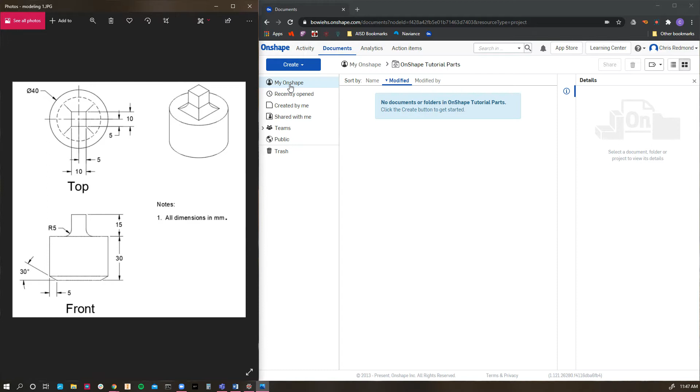Let's start. We're going to do this drawing right here. This is a part that PLTW has provided, some of the drawing, and we need to tackle this in OnShape. So I'm going to create a new document. I'm going to call this the spindle widget—looks like a spindle to me. There we go. Once we're in the parts studio, we need to figure out how to tackle this.

Now, you might be looking at the part here and going, hey, that's a cylinder, I know how to make that. That's pretty easy, that's just a circle that I then extrude up a few millimeters. That's not what we want to do. The reason is down here, this little notch that's being taken out of our cylinder. That is going to prevent us from just using a normal circle and then extruding that.

So instead, what we're going to do is use the Revolve tool. What we do in a Revolve tool is you're going to have to use your imagination. You're going to split this in half, and you're going to build half of it, and then we're going to revolve it around an axis.

So we're splitting this in half. I'm going to start a sketch in OnShape. I'm going to select the front plane, and then use the view cube to go right into the front like this. I'm going to make a rectangle—you can use any rectangle you want. In this case, I'm going to use a center point rectangle because I like them occasionally.

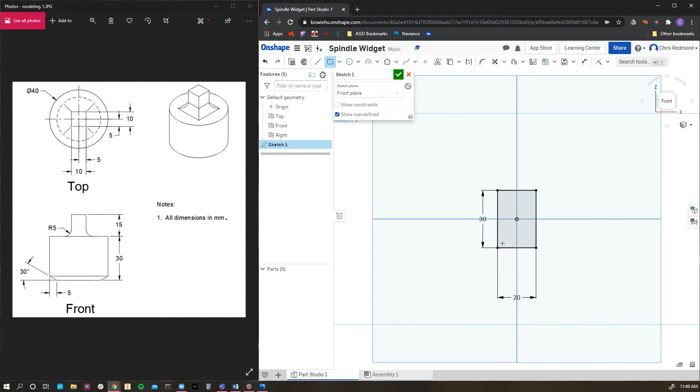My next task is going to be creating this notch on the bottom left. I'm going to do this over here. I'm going to get out of my rectangle tool by clicking escape, zoom in just a little bit. So I need to make a notch here. Some of you with a bit more experience with 3D parts might think you could do a chamfer right here. The reason you can't is because a chamfer is always going to be at a 45-degree angle. In this case, we need it to be a 30-degree angle, which is technically not a chamfer. So I need to make this notch.

The way I'm going to do that is with a line, just a single line. I'm going to click it and lock it into the bottom of the rectangle, then move it up across the side there. I don't want it locked into place here—I want it off the side, because I want this angle to be movable a little bit more. So I'm just going to put it over here, click it there, and then hit escape to get off of my line tool.

Now I need to add a few dimensions to this, and that is pretty simple. You see that this line starts—this notch is 5 millimeters from the left edge. So I'm going to use my dimension tool up here and add this dimension right here. Click on the left, click on the right, and specify that those two points are 5 millimeters apart, just like that.

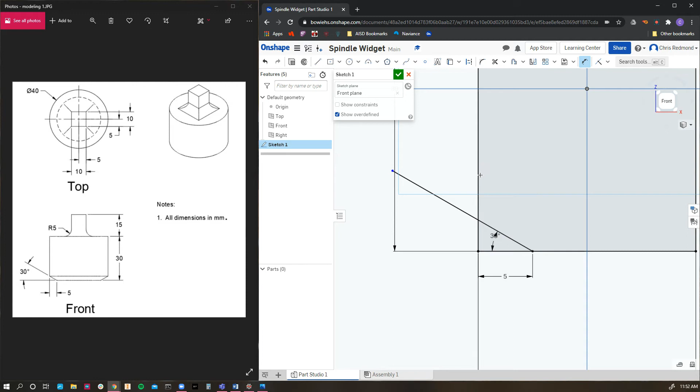Very simple math. Instead, I'm going to do this side here. Click it down here—you can put it here or down here, it doesn't matter. Click down and then type in 30 and hit enter. You see that it is now moved, and it's free to move because it wasn't locked into place on this line here.

Now I'm going to hit the escape key, because at this point I need to make some of these lines go away so I can move on to the next part, so I can extrude this. So what I'm going to do is click on the trim tool and trim away some of these lines just like that. And now the first sketch is done. I'll click on the green check here.

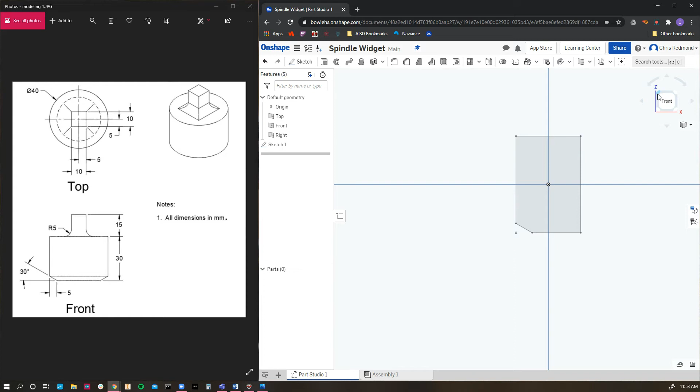Still in the front view, which isn't always helpful, so I'm going to click on the corner here to go to the ISO view.

Now here's the magic. Instead of using extrude to make a block-like shape, we're going to use this tool called Revolve. It does exactly what it sounds like: it takes your sketch and revolves it around an axis.

It's a really nice way to make complicated round shapes, like a vase. We're going to make a solid, something new, so we click on our sketch here, nothing happens, and that's fine because next we need to select the axis.

In OnShape, it doesn't move right into axis mode. In other programs like Fusion 360 or Inventor, once you click the sketch it would automatically help you select the axis. Here, we have to click the Revolve Axis button and select which axis we want to revolve around. We could revolve around anything, but we want to pick this one right here.

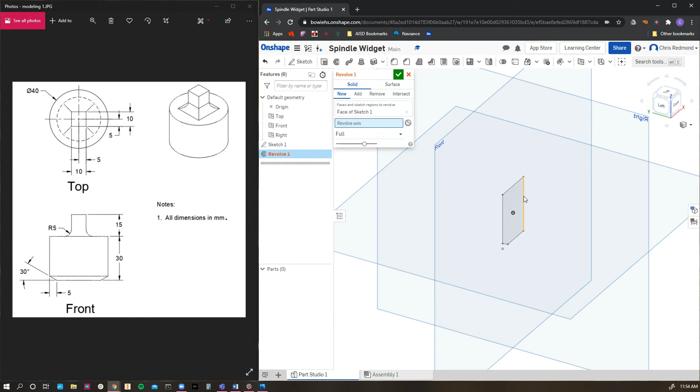This is the center, or what will become the center of our spindle. When I click on it, it rotates around that axis and fills it in. I click the check, and from this angle it looks like a regular cylinder, but it's not. If you look underneath, it has the notch taken out, which is pretty cool.

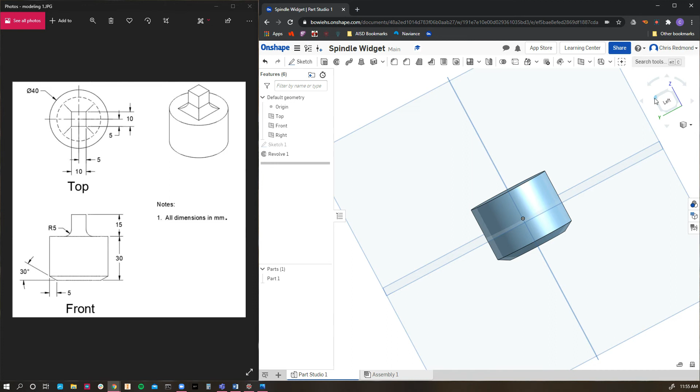So we'll go back to a regular ISO view. To do the rest, we need to extrude a block out of the top of our cylinder. Here it's a 10 millimeter square.

It is 15 tall, and it has this edge right here that is called a fillet. In order to make that part, we're going to start a new sketch right on the top of our cylinder. I'm going to move our view cube to the top view, scooch it over just a little bit, and zoom in.

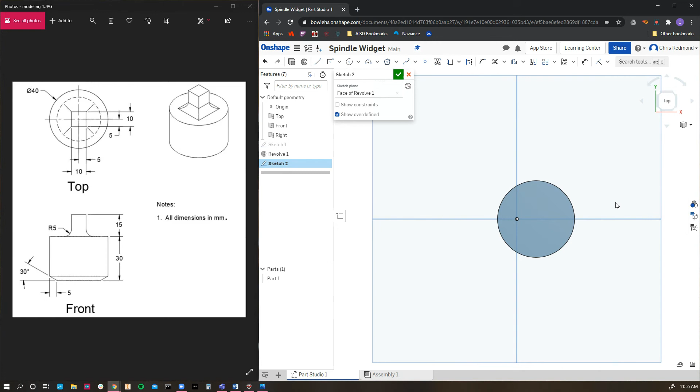Now we need to find the center and put in a square here. The center of the square will be a specified distance from the edge.

So we'll take our rectangle tool and do a corner rectangle here. We'll put it anywhere and specify 10, hit enter, then 10 again. Excellent.

At the moment, our square does not appear to be centered. We can fix that using dimensions. If you had oriented this so the center was on the origin, you could use a center point rectangle and it would automatically be centered, but in this case it's not.

Since this is 40 in diameter and this is 10 tall, that means we want this line to be 15 away in this direction. Now that it's scooched in a little more toward center, we have to do the same exact thing on this axis as well, just to make sure it's exactly centered. You can see that it was not.

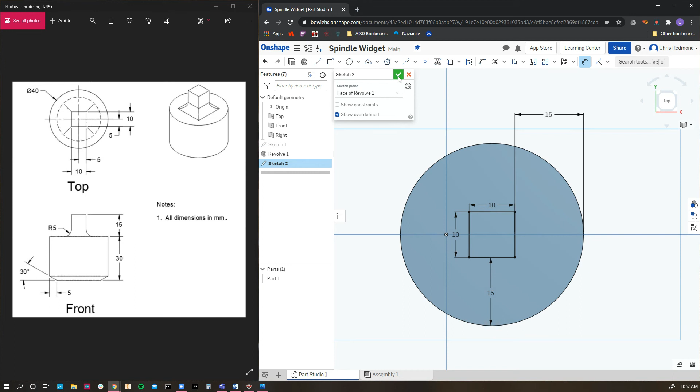Now that square is perfectly centered on our cylinder. Our sketch is now complete, and we're going to turn this into a feature. We'll click the green check and go back to the ISO view on the view cube.

Now we need to extrude our square up 15 millimeters. We're going to click the extrude tool on the top left, click on our square, and change our depth from 25 to 15 and hit enter. And there we go, finish the extrusion just like that.

Now finally, we need to get this rounded edge here on our spindle, our now extruded shape. It kind of looks like a top with a flat bottom in this case, so we need that to become rounded. We're going to use the Fillet tool to do that. It's right here on the toolbar in this mode, so we'll click on Fillet.

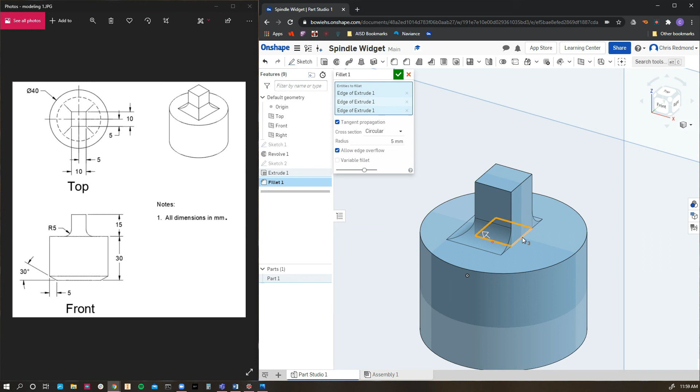We can choose which edges we want to fillet. In this case, we want all of these around the base of the square. I'll click this one, click this one here, and now we have to go to the other side of our part and pick the other two. Now it's starting to look appropriate.

What's interesting is it defaulted to a 5 millimeter radius, which is exactly what it needed to be already. You could increase or decrease this depending on the radius you need. If we wanted it higher, like 7, it would be a more dramatic curve. If we wanted it less dramatic, you could back it down to say 2.

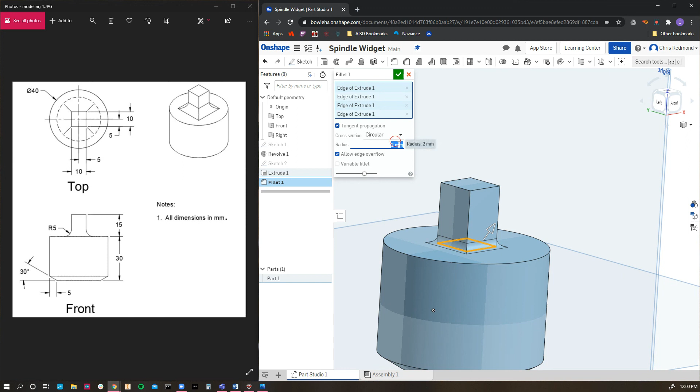That gives just a little tiny fillet at 2, but we want it to be 5, so we'll put it back to the default 5, hit enter, and click the check. Now we have our completed spindle, just like that.

Looks exactly like our drawing. Pretty cool.